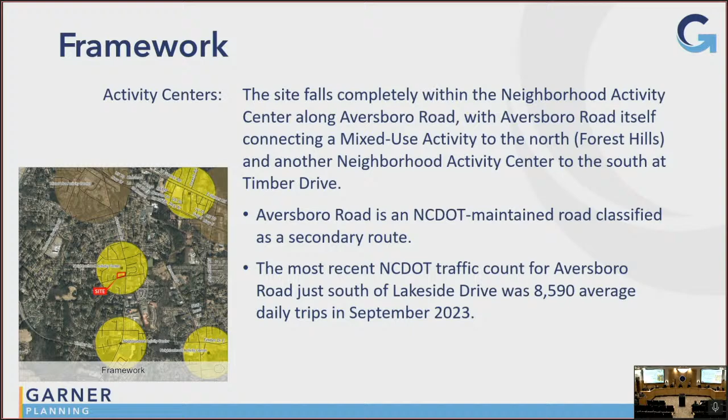The applicant has narrowed the possible uses to 14 out of 60 in the CMX conditional, and 13 out of a possible 37 within the NMX conditional district. The primary difference between the two districts is that within the CMX, fuel sales are allowed, whereas NMX does not allow fuel sales.

They have restricted tobacco, CBD, and vapor sales as a standalone use, and that use will not be allowed within the NMX or the CMX district. However, tobacco sales will be allowed to continue within the existing convenience store and expansion area, but it cannot be the primary use for those locations.

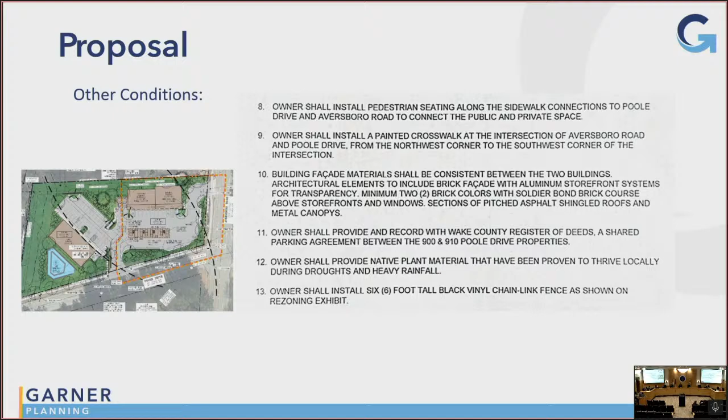So here you have their master plan, and just to highlight a few of the areas mentioned, this area here is where the outdoor plaza will be located. This building here is the new retail building that is a maximum of 5,000 square feet. You have the existing building here and the proposed extension. So between the existing building and the proposed extension, you would have a total of 4,500 square feet.

Here is a proposed access, full access from Aversboro Road. Also, here is where the crosswalk would be installed and the 6-foot black vinyl fence. You have one storm control pond here on the site, and also you have plantings that front on Aversboro Road and Poole Drive.

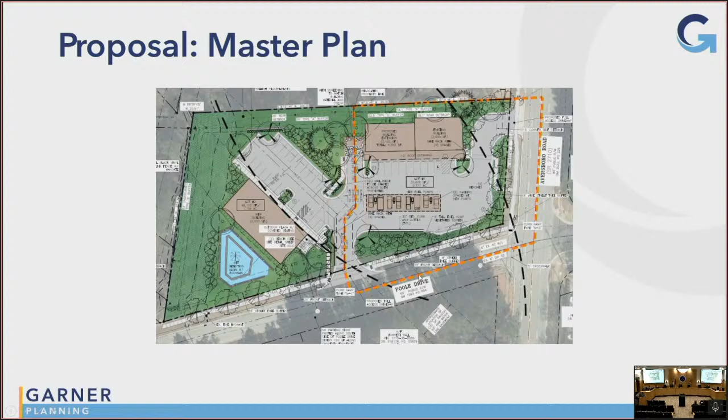So again, this site is a total of 1.88 acres. Again, there is 4,500 square feet of existing building and proposed building, and then within the NMX district, 5,000 square feet of new commercial space. 9,835 square feet of tree canopy is required. Applicant has provided 18,000 square feet of tree canopy preservation in addition to new canopy cover.

Parking, they have provided 14, not including the fueling spaces, and they're required for 9 spaces. The sales and retail building would require 20, and they have provided 23. We just made a note that other uses may require more or less, so it will be determined during zoning compliance what exactly that parking number would be.

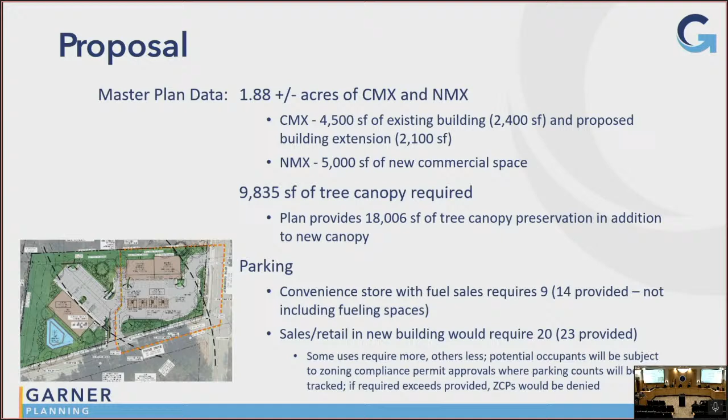The site is located within the watershed protection area, so it is subject to water quality, nitrogen, and 85% total suspended solid treatment and other quantity requirements. Again, there's one surface stormwater control measure, and the city of Raleigh will provide water and sewer to the site.

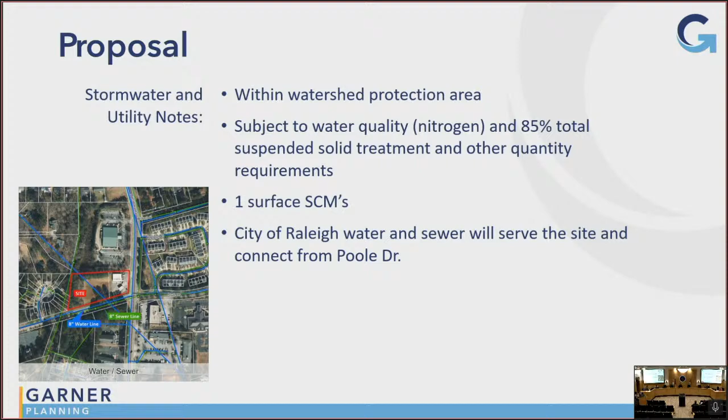There will be 2 proposed access points, 1 proposed full access from Aversboro, and 1 shared driveway along Poole Drive. A traffic impact analysis was not required by the town of Garner or NCDOT, but the applicant has provided a trip generation letter conducted by Ramey Kemp, a traffic engineering firm. So the site was expected to generate 481 average daily trips, 23 inbound in the AM and 21 outbound in the AM peak, and then 29 in the PM peak inbound and 28 outbound in the PM peak. And there were also no off-site improvements recommended.

The environmental and cultural resources notes, there are existing streams with associated buffers along the western boundary of the project. We have been provided by the applicant a letter from their geotechnical engineers regarding the leaking underground storage and the remediation of those tanks. So before redevelopment could proceed, that remediation will need to be handled.

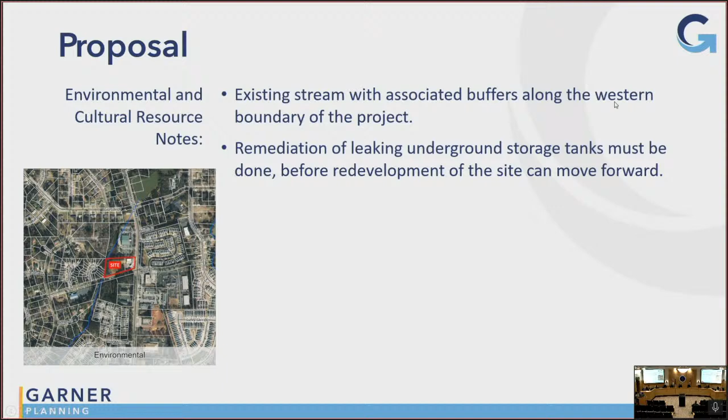There were 352 properties notified for the neighborhood meeting. The first meeting was held in September of 2023, and the second meeting was held in July of this year. There were 12 attendees at the first meeting and 11 at the second. You can read those details in the staff report attached.

In the context of the comprehensive land use plan, this site is within the neighborhood activity center. It falls within the retail area character typology, and is a level 3 area to enhance.

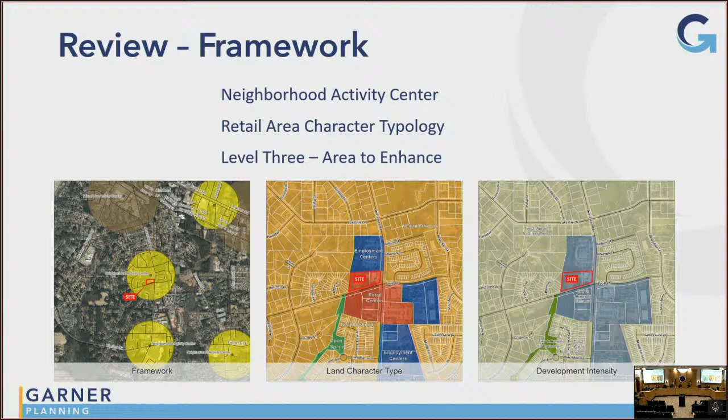As this request was evaluated for consistency, there were 10 growth framework criteria evaluated. Nine were strongly consistent and one strongly inconsistent, due to the lack of an identified pocket park. However, the applicant has proffered a small outdoor plaza, and staff notes that South Garner Park is 0.4 miles away from the site.

For land use and community character consistency, 17 criteria were determined to be applicable or meaningful to address. The consistency is modest. There are minor changes and additional details that shifted the consistency, due to the emphasis on the public realm, the use of open space to create a stronger central focal point for the neighborhood, and proffering additional conditions or clarifying existing ones that speak more directly to specific recommendations of the comprehensive plan. So they were able to shift their consistency slightly.

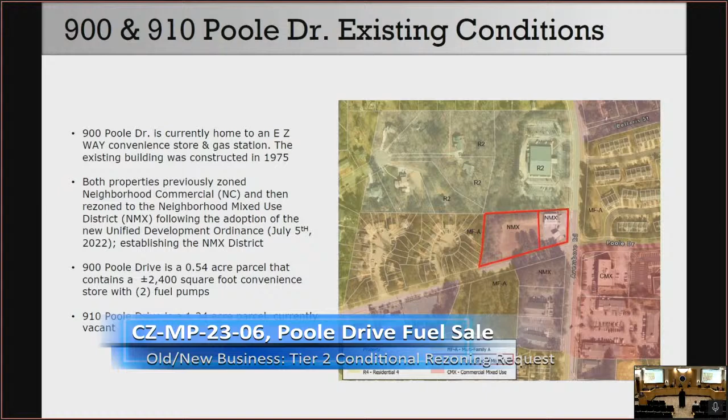900 Poole Drive is currently home to an E Z WAY convenience store and gas station. The existing building was constructed in 1975 and previously operated under the name K. Webb's. Both properties are currently zoned NMX.

900 Poole Drive is 0.54 acres, contains the 2,400 square foot convenience store with 2 fuel pumps. Those fuel pumps are not currently working. They've been found to leak over the last, maybe 5 or so years, before my client actually bought it. So we brought a consultant to talk about how we're going to remediate that, and we'll hear from him shortly.

910 Poole Drive is the open wooded lot, 1.34 acres. It's currently vacant.

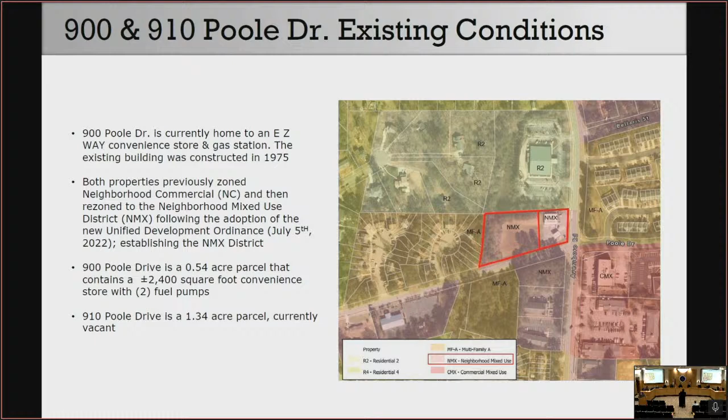The applicant wishes to remove the 2 existing pumps, the canopy, and the underground tanks, and remediate the soil and water in the area where that leak is. They would like to install 4 new pumps, new canopies, and new underground tanks.

During the site plan process, we were informed we could not expand the fuel pumps without requesting a rezoning to CMX. The owner would also like to expand the existing convenience store by 2,100 square feet. That would allow room for a kitchen, to prepare food for sale, like a pizza place or a sub shop inside the convenience store. Right now it's a pretty small store and they don't have room for that. That extra area would also help with shelving for selling merchandise.

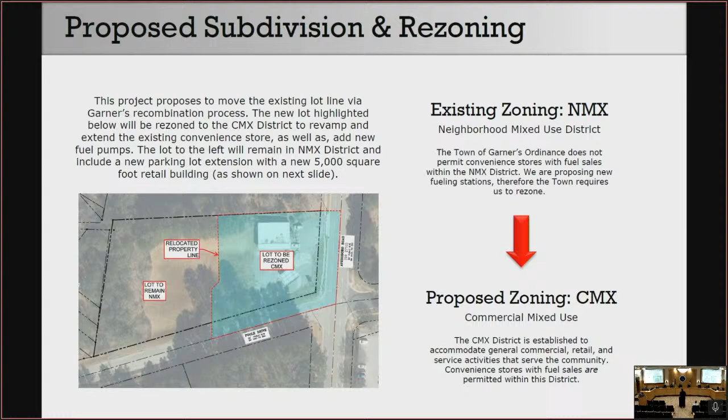So the underground storage tanks have been, well before I got involved with this project, Mr. Shetty has been working on it. He worked with the previous owner on this project and he's working with the new one. If it's okay, I'd like to have him come up and talk about the tanks, because that was a big question last time, and I kind of knew it, but he knows it exactly.

Okay, thank you. Please make sure you state your name, your association, and address. Good evening, my name is Rohit Shetty. I'm with Geological Resources, Inc. in Monroe, North Carolina. The address is 3502 Hayes Road in Monroe, North Carolina.

As Sam was mentioning, I've been involved with this particular site since 2020, when we represented the previous owner of the tanks. As part of their environmental due diligence, they hired us to do a phase 1 and phase 2 environmental site assessment, where we collected groundwater samples and detected some contamination. With the previous owner's permission, and as required by North Carolina DEQ's regulations, we had to report that there was a potential petroleum release at the site. North Carolina DEQ, the Department of Environmental Quality, their underground storage tank division directs all assessment and remediation of underground storage tank sites, convenience stores, or bulk plants.

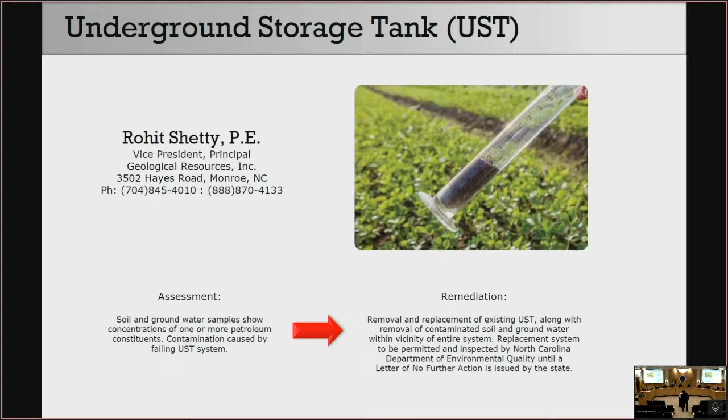But in reading this report, you've got 10 times over the level 2B requirements. You've got free product flowing that's just a mere inches below the surface. That property, as I recall, sits up a little bit higher. How are they going to do this—you talk about in situ, and I'm familiar with remediation, I used to be involved with that—but why not just remove the contaminated soil, take it off site, treat it off site, and have a clean site?

You talk about the plume, and you've done 2 studies, but you also mentioned you don't know where the plume is or if it's still moving. You wanted to determine if it's stable or not. So has product left the premises?

No, so all very good questions. The assessment that we did is called a comprehensive site assessment. That basically allows us to define the extent of the plume, and so that has been defined. We know where the contamination is on site, which is really around the existing tank basin, the product lines, and the dispensers, and it's really 4 monitoring wells that currently exceed the 10 times 2B standard. The soil samples we collected since 2020 are all below the residential soil cleanup levels. So it's just the groundwater that we need to clean up.

In your site plan that you provided for us, you're showing a heavy dash line, curve line. I'm assuming that is where those plume areas are suggested that they are not expanded. Is that it? No, so I actually have never shown a plume area. Do you know where that is?

Yeah, I can maybe just, if there's a pointer, I could just circle it. Yeah. I know y'all might not be able to. So I can show on both sides actually. Just for this side, it's that red button. Oh, the red one. Okay.

There. Okay, so there are tanks currently. There are two tanks here and one tank here, and the dispensers kind of run like this over here. So we have monitoring wells over here, which are clean, and most of the contamination is like in and around that area, around the tank basin, around this tank, and to the west of the current dispenser islands we've got about 3 monitoring wells. So we've got 2 monitoring wells here and 1 to the south here, which are all clean.

Were you able to see? Yeah, I see it. Okay, so really the plume is kind of in and around here.

It's not a very big plume, so in the southeast corner. Yeah, so it's kind of here, and the pond is down here. We actually have monitoring wells here which are clean to show the outer edge of the plume. That basically says that everything to the east of that is where there is contamination, but to the west of those wells, it's clean.

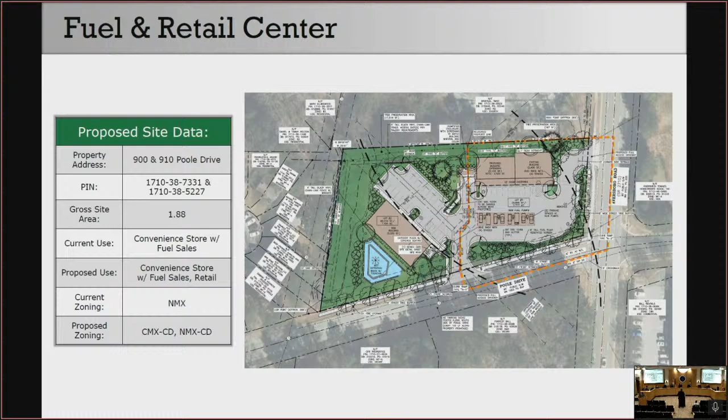So this is the general layout of the property, the existing building, the stuff we've already been talking about. I'd like to point out that the property to the west does not require a rezoning and could be built by right without coming to council or planning commission. We're including that to try to get 4 pumps at the site and make it more palatable for everyone else.

This slide shows a breakdown for the nerds in the room who like to think about the exact square footage, area, building setbacks, current uses, and proposed uses. Parking was a big issue during our neighborhood meetings about how many spaces we're providing. We're 4 over on the fuel center and 3 over on the retail. We're also agreeing to share parking, so if you've got a sub shop that's popular at lunch and another place popular at dinner, sharing parking helps keep everybody with a good spot.

We've limited the uses we talked about, basically limiting the CMX uses to NMX, what you could have in NMX, with the exception of the fuel pumps, limiting the number of pumps to 4. Right now there are 2, and I think by right we'd be allowed to rebuild those 2 since they're existing non-conforming and we're maintaining them. So our rezoning ask is really can we have 4 pumps instead of 2.

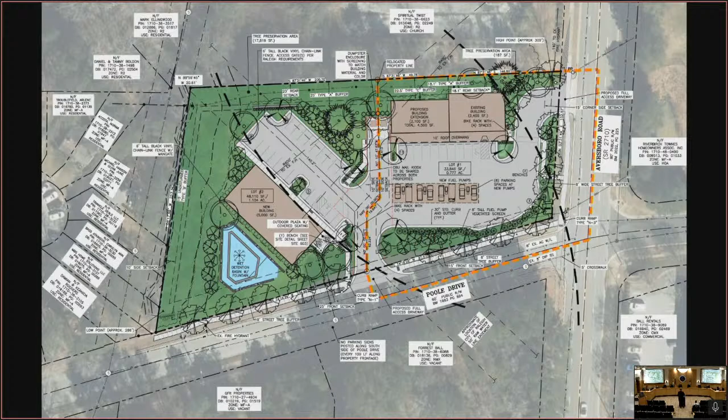This is just the rendered site plan. I wish she was here tonight, but she's not. We talked about how one of their other fueling centers, on US 70, has a food truck where people get together — it's a gathering place. This store historically was that too, but it's a little run down now and less of a community gathering space. Part of this project is to try to build that back.

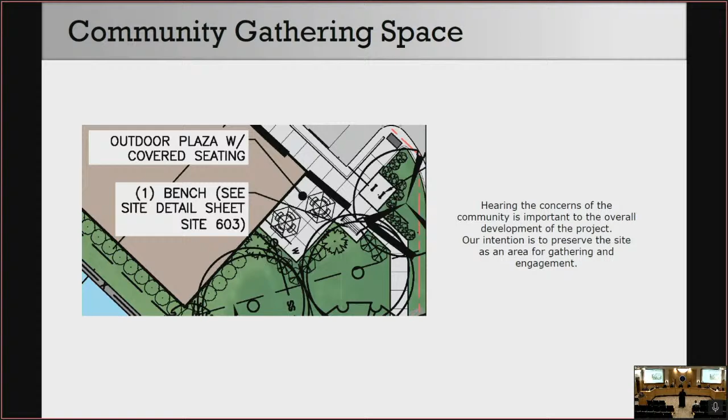There's not a ton of area dedicated to it, but they've committed to a patio and some sort of art on the patio or the wall behind it. Some of the ideas are probably too big for what we're looking at, and we don't want to do a mural if the town thinks that's a bad idea or would look bad. But some sort of public art would give the people who live around there and frequent it a place to hang out.

I know there's a lot of activities for kids, soccer and stuff, right down the road, and that was one of the things the lady mentioned — that group needs somewhere to eat close by. So we're trying to provide that, a space for people to get some food without having to get back out on Aversboro before returning to the softball or soccer field.

These are our architectural elevations. We went through them at the last meeting. We're trying to give a little bit to some of the residential that's there, and then also mimic some of the commercial that's kind of catty corner across the street. Like on the southeast corner of Aversboro and Poole Drive, there's an office park that's Zone CMX that has similar architecture, so we tried to borrow from that.

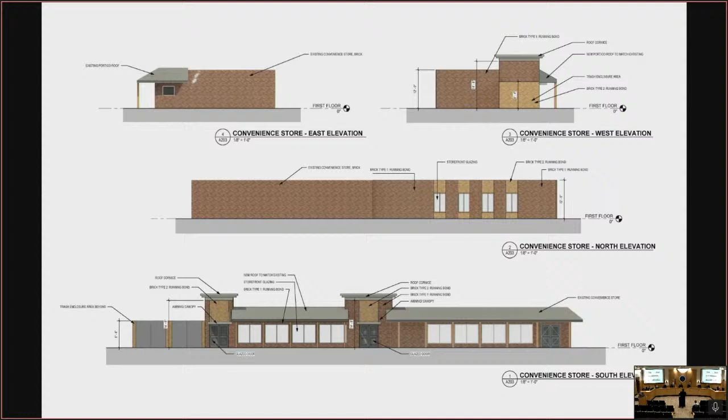And this is the existing convenience store, and then the addition to the left. And this is the new retail building. We're not sure exactly how many individual users would be in there, if it would be 3 or if it would be 5, so those storefronts may shift one side or the other.

So through 2 neighborhood meetings, we've gone through the site plan and the construction drawing process for this site, not knowing at first that we needed a rezoning. This owner has made a lot of efforts to make this acceptable to the neighbors and to y'all and to the council as well. We feel expanding the pumps is necessary to revitalize and modernize the station.

We've made multiple concessions and commitments, starting with DOT. The driveway on Aversboro Road right now has a bunch of head-in parking spaces along it. DOT said that's not safe, so we said we'll get rid of those, and move the existing driveway for the station 110 feet away from the intersection to make it easier for cars to get out and get onto Poole Drive.

For the town, we added the plaza, the public art, the pedestrian connections, the seating along the pedestrian connections, the bike parking. We have 21% tree cover, sidewalk along Poole Drive. For the neighbors, we added 3 parking spaces, the cross parking agreement, a fountain to the wet pond, and a fence along the western property line because some people were cutting across the neighbor's property. We also limited the uses.

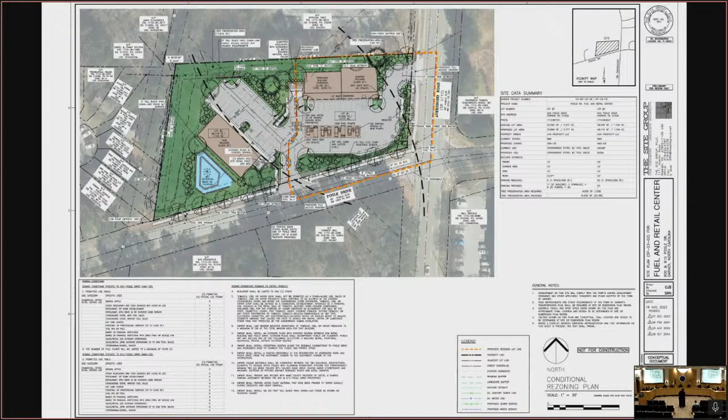Okay. All right, thank you. Yeah. Mr. Boland?

Regarding the reports from the neighborhood meetings, I want to compliment you. This is one of the clearer reports on neighborhood meetings that we have received. The questions were articulated from the attendees well, and the answers were answered well, not in code. I just wanted to compliment you on this. It was really interesting reading the questions the neighbors had and the answers you had. That's all I have to say. Thank you very much.

Ms. Bishop? Yes, so several things. I really like the convenience store near the houses, I think that's nice, and the pedestrian walkway is definitely nice. My biggest concern, echoing what Mr. Carson was saying, is the contamination -- the soil, as well as any air pollution, especially since there's homes nearby. I know gas stations can emit different chemicals in the air, which isn't great to breathe in, and there are a lot of residents in that area.

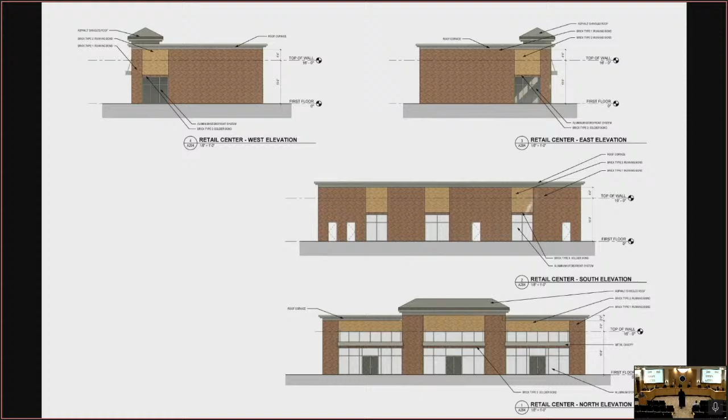There's a sidewalk that you're also showing, so as people walk along that, I don't know, perhaps the wet detention becomes more of an amenity as you move along that edge, or not. Those are just some things to think about.

This is an existing retail space that has existing tanks. So my question - if the tanks remain and nothing else happens to this site currently, what's the deterioration of those tanks, and the current leaking of petroleum into the...

Typically, the American Steel Tank Institute has a life for these tanks, and they say once they pass the 20-year mark, that's when your deterioration really begins. So right now, because the previous owner found there was a problem, they decided let's not continue selling fuel, because there are certain testing requirements - if it passes leak tests and everything, they can continue to sell fuel according to the state.

I think the previous owner was also a little bit more proactive, and they were very scared. They said, well, we found there is a problem, let's not add to it. So they instantly decided let's not sell any fuel until we remove these tanks and address this.